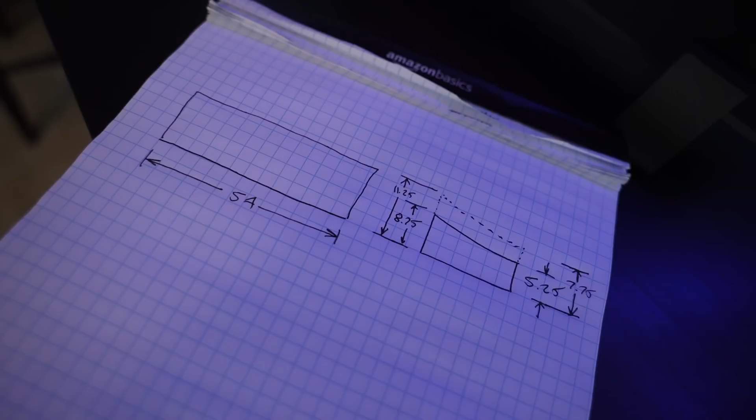Currently here on the channel, I am working on building a custom truck subwoofer system that is going to feature 3 JL Audio 13 TW5s. Off camera, I took some dimensions and determined that without a seat lift, I would have enough airspace to run 2 of these subwoofers. But since we want to run 3, I did choose to do a 2.5-inch seat lift in order to gain more room.

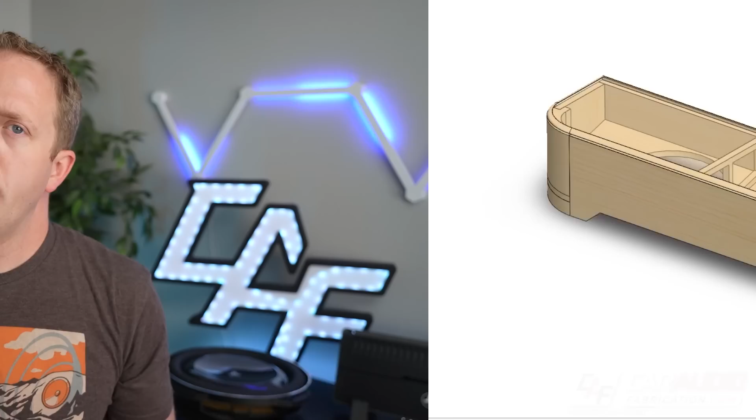So what does the design and planning process look like for creating a custom underseat subwoofer enclosure? Let's dive in.

Before we can get into the design, it is critical that we have proper dimensions to work within. Previously on the channel, I made a full detailed video all about how to find these initial dimensions. Also included in that video, I discuss how you can approximate air volume, so you make sure you don't pick subwoofers that simply aren't going to have enough air volume under your seat. If you haven't seen that video process, at the end of this video I'll have a link for you guys to check out.

So now that we know the space that we have to work within, we can begin to plan out our design.

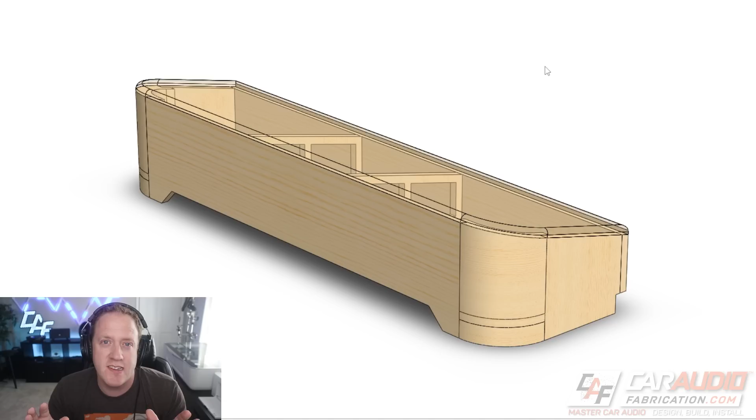Let's head on over to the computer and check out this design. So here it is, my friends. If you guys have watched my design videos before, you know that I like to always start with the finished project, so you can see what we are working towards once we start stepping through all of the design details. So here it is.

Here's our enclosure. If we flip it over, obviously the top is going to be a solid piece of wood, it won't be clear like this. I just made it clear here in the model so you guys can see inside, but you can see there are 3 subwoofer cutout holes for our 3 13 TW5s.

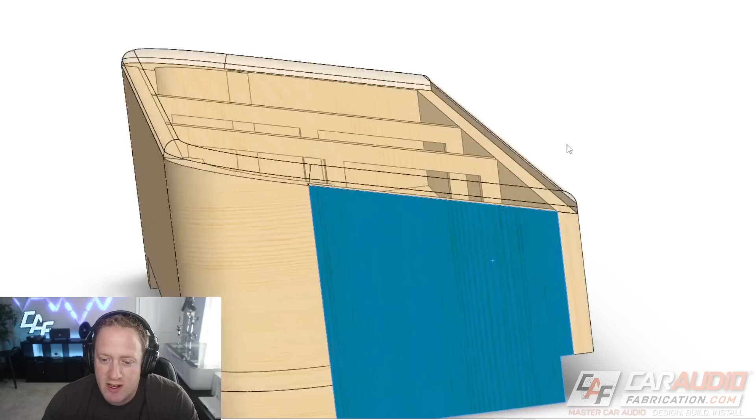I think the best way to begin is just to look at this from the side profile and realize that this is simply just an underseat wedge style shape. You do see that there's a notch here, we'll talk about that more shortly, but overall we just have this one angled top face.

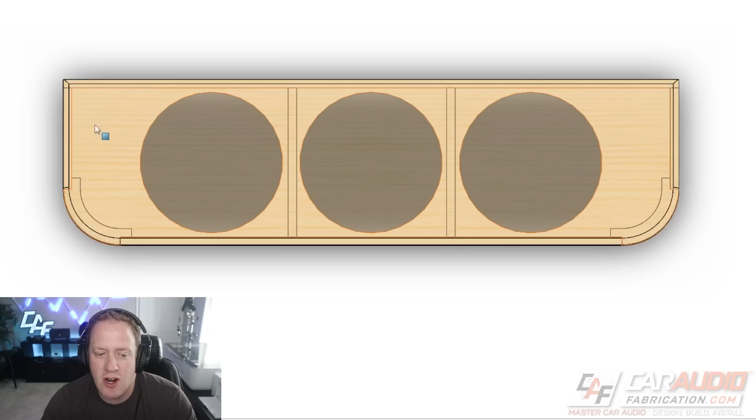Now where things start to get a little bit more complicated is if you look at these front corners of the enclosure, you can see that these are rounded. This really becomes apparent when we look at a top view here. You can see those 2 rounded corners on the front side of the enclosure, and the reasoning for this is because the seat itself in the vehicle doesn't have a sharp 90-degree corner, it has a rounded corner, so we want to match that profile.

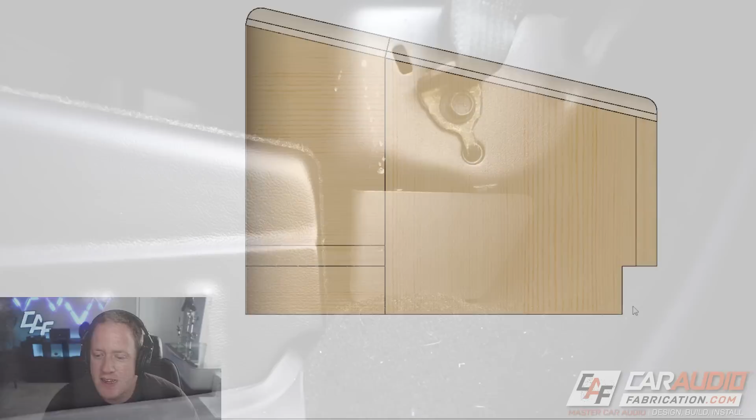Looking at the side of the enclosure again, the reason for this notch here is just because in the vehicle there's a small little notch on the floor, and by having this notch in the enclosure, it doesn't actually eat into any of the air volume. Instead, this notch actually just cuts away part of the side area that is being used to raise the subwoofers off the floor anyhow, so no big deal there. It's just going to give me a little bit more clearance over a raised lip in the vehicle, allowing this back wall to extend a little bit further underneath of the seat.

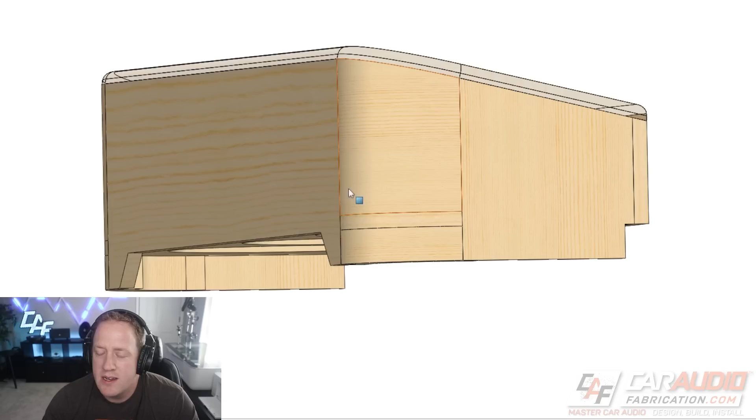Now, just in case you're wondering, the reason that we went with downfiring on these subwoofers rather than upfiring them into the seat is typically in a truck application, you're going to find that loading that bass wave, loading that sound wave off of the floor, is going to result in better sounding bass.

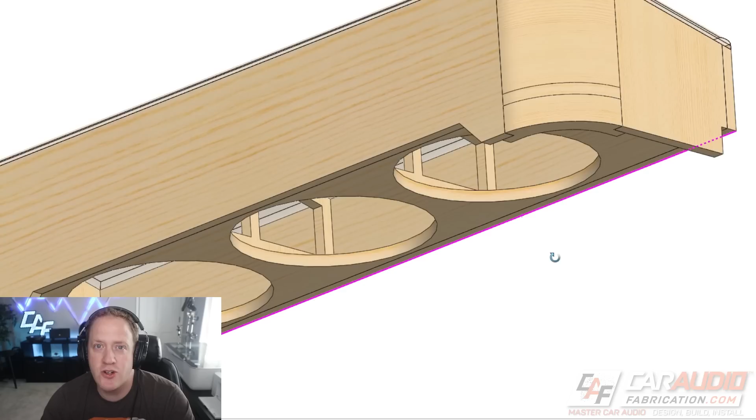Now, this isn't always a hard rule. It can be different from vehicle to vehicle. I recommend building a small test enclosure that is just really simple, 6 sides, before you ever build out a full complex enclosure like this, just to test and make sure that you like your orientation.

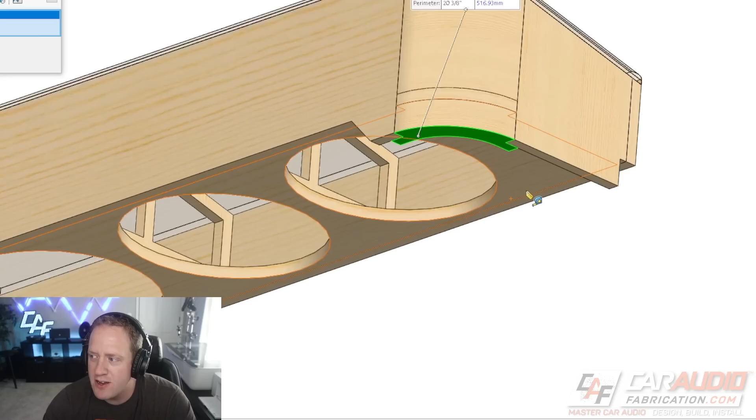But in this case, like I mentioned, we are going down firing rather than up firing. What's important when we're doing a down firing enclosure is we want to make sure we have enough clearance from the floor to the mounting surface of the subwoofers. We want to account for the thickness of the subwoofers, and for the fact that the cone and surround will move with the excursion of the subwoofer. We obviously don't want the subwoofer slapping the floor of the vehicle, so this is an important design detail to pay attention to.

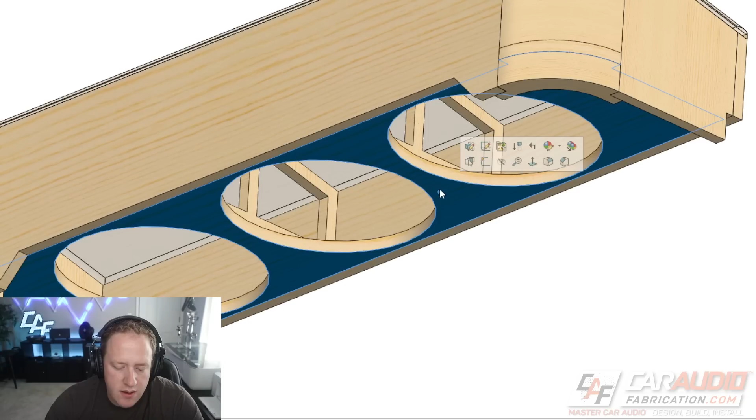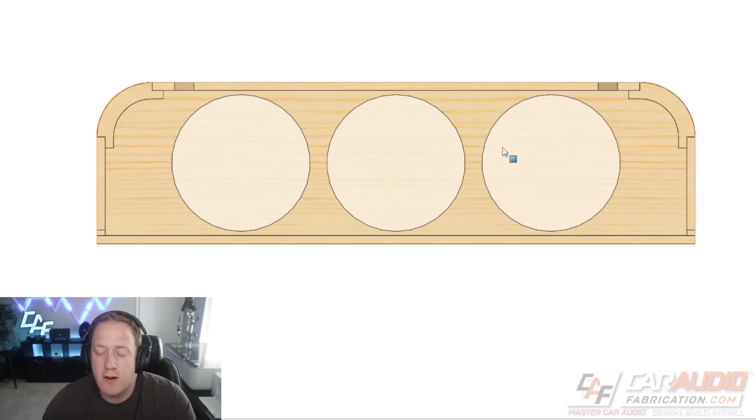Now, if we look at this enclosure from a bottom view, you can tell that on this baffle - the piece of material that the subwoofers mount to - a lot of material is removed because we have to have those cutout holes for the subwoofers to go inside. Because we've removed so much material from this surface, it's a good idea to tie this surface to another surface to strengthen it and tie it to other sides of the enclosure, and that's why we have these internal window braces on the inside of the box.

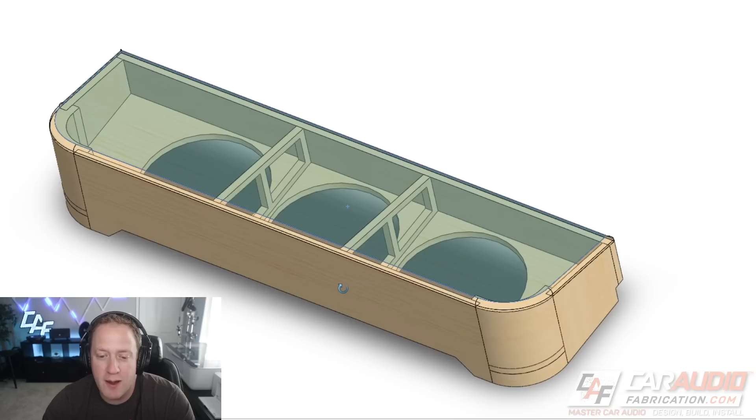Even with the top of this enclosure being a large solid piece, it's a good idea, since it's such a large spanning piece, to have those braces there as well, just to strengthen it all up. This is going to make our enclosure really good and strong and avoid any resonance issues.

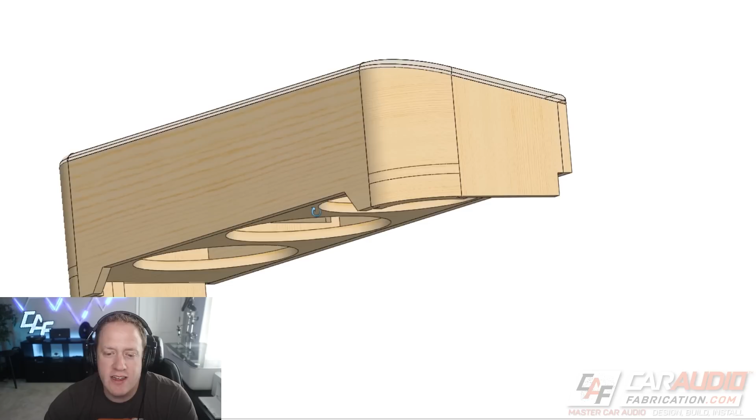Now, you'll also notice there's a cutout on the front of the enclosure underneath here. That's to allow some of that energy from the subwoofers to transfer into the cabin of the vehicle. We also have a raised cutout on the back side of the enclosure here. What I really want to point out, since this often gets brought up, is that this isn't going to be sealed to the floor of the vehicle. It's not an airtight seal, so that energy transfer is going to be able to occur even though we are so close to the floor of the vehicle.

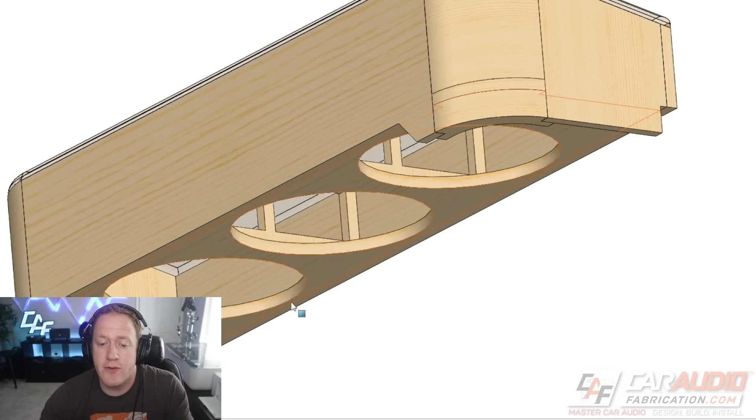And that's another thing worth bringing up. A lot of times people ask with a downfiring enclosure, hey, don't you want more space between the subwoofers and that surface? Ideally, yes, if you could have more space, that would be great. But the problem is, if we raise these subwoofers even more, then we're losing our much needed air volume inside the enclosure that we need for the subwoofers to properly operate.

Now, while we're on the topic of air volume, before we begin the design process, we of course want to have an idea what our target air volume is going to be. In this case, this is a sealed subwoofer enclosure that we're making. So let's check out the specs here, and it looks like we want to target a sealed air volume of 0.8 cubic feet per subwoofer. We have 3 subwoofers, so our goal is 2.4 cubic feet of air volume after all displacements. Let's discuss that during the design process as well.

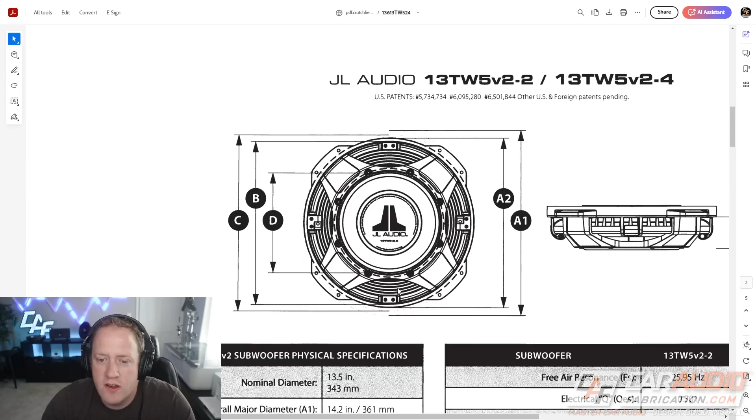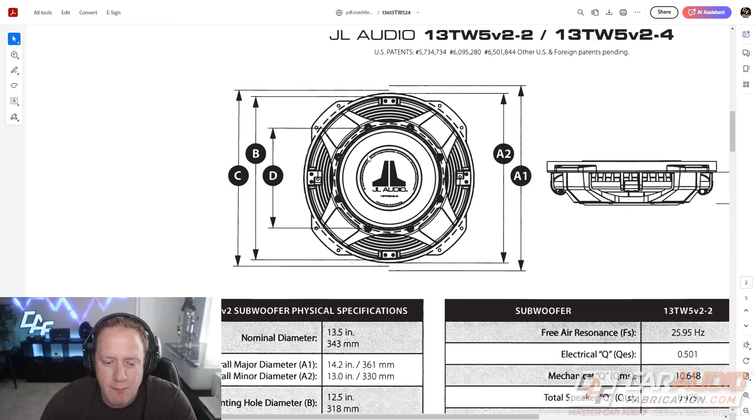So once we've clicked that, we can of course usually find some important dimensions that we're going to need for designing our enclosure. Things like the mounting hole diameter, that's the cutout hole in the baffle. Also the outside diameter of the subwoofer. This particular subwoofer is kind of unique in that case - we'll talk about that more in a second. And we're of course also going to want to pay attention to the mounting depth. This is critical for underseat enclosures.

So let's roll back our design history here to our very first step. And this is where I create the overall profile for the subwoofer enclosure. Now, based upon some of our initial dimensions that we've already taken, we know we want a 54-inch width and a 14 3/4 inch depth.

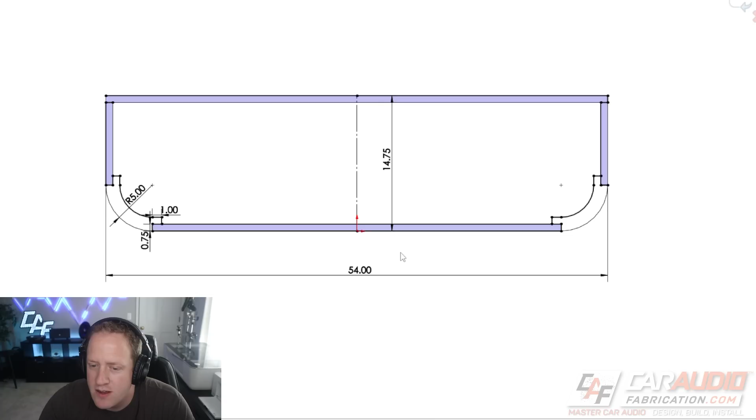So I've got those values in there, 54 and 14.75, and I've also added in these rounded corners. Now, the reason I haven't just drawn a simple round over there is because I want to actually stack these corners up. I'm going to be using some of the Mobile Solutions quick corners, which have this profile here, which will allow me to easily create a stacked rounded profile for the outside of the box.

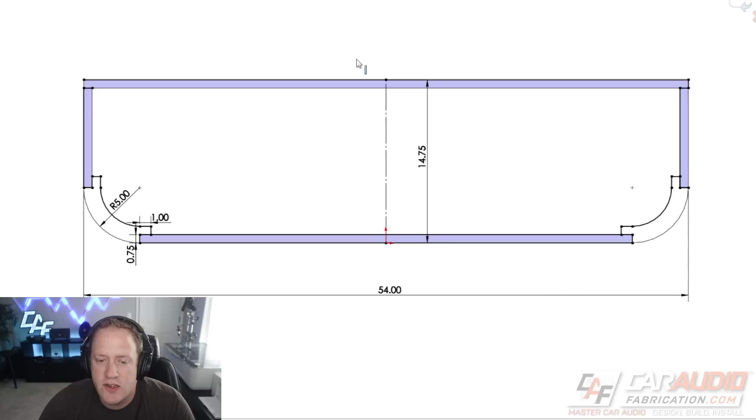So based upon this initial profile, what I've done is I've extruded some of those rounded pieces, and I've extruded these to a height of 1 3/4 inches. The reason for that is I took some measurements of my subwoofer, and it's about 1 inch from the bottom flange of the subwoofer to the tip of the surround. And then I know the excursion of the subwoofer, that's in my manual right here, it's about 0.433 inches. So I know that worst case scenario, it's going to be about 1.433 inches that surround is going to come away from the mounting surface of the subwoofer.

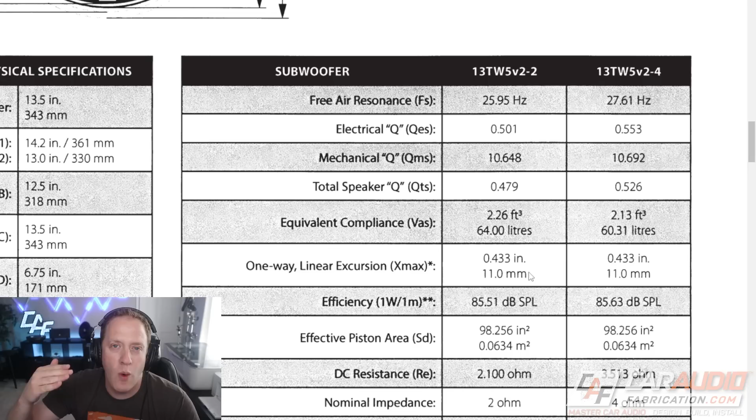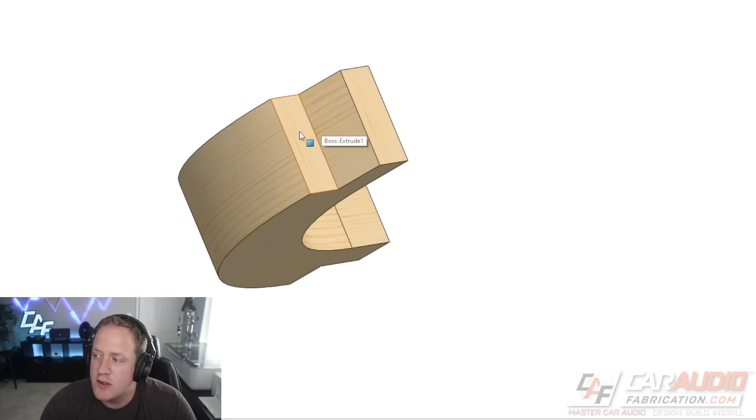I know that this surface is going to be the floor of the vehicle, and I know that this surface here is going to be the same surface that the subwoofer is mounted to. So as long as that height dimension is more than that 1.433, we should be good to go. And I like to give myself a little bit of extra breathing room, so that's why I went with 1 3/4 inches. So when I go to actually create this piece in real life, I'll make it out of two 3/4 inch pieces of wood. That will give me 1.5 inches, and then I'll add an additional 1/4 inch piece.

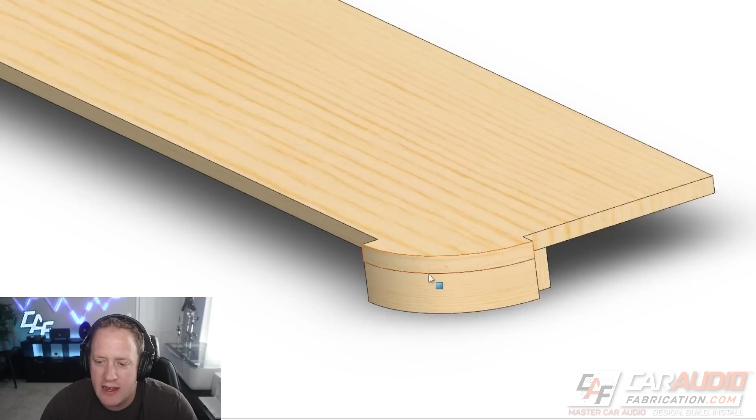Now for the next step here, again, based upon that initial profile that I drew, I'm going to create this board here. This is going to be my mounting baffle for the subwoofers. It's simple enough, but you can see that it notches in following those curved corners. And the reason for that is this is going to give me a surface to attach some of these vertical pieces to. Stepping through to our next step here, I've just extruded this profile even higher, and I intentionally go much higher than I know the front of the enclosure needs to be. And that's because we're going to trim these off in the model much like we will in real life.

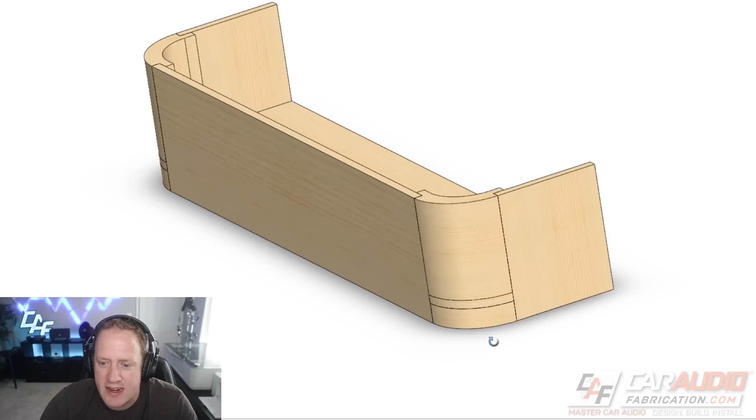So now that we have those added in, let's add the front and sides of our enclosure as well. I've simply drawn those in and extruded those. I'm going to be using 3/4 inch materials throughout the build of this enclosure, so I knew what I needed that extrusion to be, but we've got those added in now. So now that we have that front and two sides of the enclosure, let's go ahead and add ourselves in a rear panel of the enclosure. And now we can do the cut of that top surface.

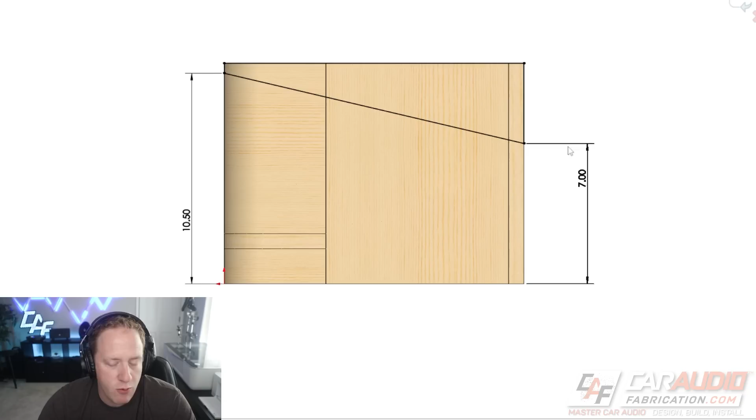I want to show you guys really quick how I did that cut because this is important. We have to make sure and remember that we're going to add a 3/4 inch top piece to the top of this enclosure. So I don't want these values to be the total value that I want the final enclosure to be at. I want them to actually be 3/4 of an inch less. So since I know the rear of my enclosure needs to be 7 3/4, I've got 7 inches here. And since I know the front of my enclosure needs to be 11 1/4, I've got 10 1/2 inches here. Again, it's 3/4 inches less.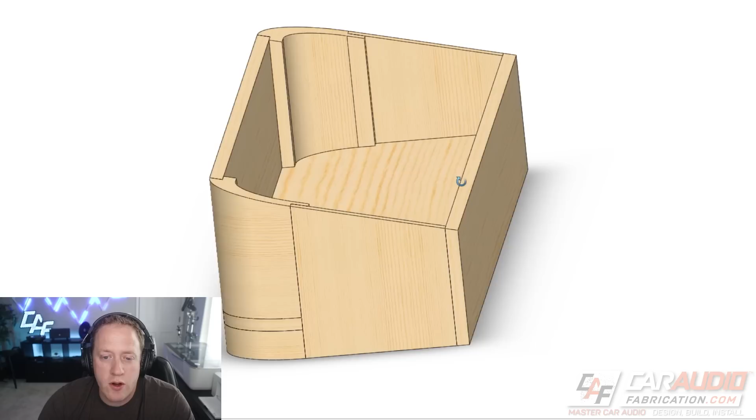So I've created this triangle profile here. And if I execute this command, you can see it makes that cut right there that's going to trim off the top of our enclosure. Now, the reason it's advantageous to work through this design process on a computer is now I know in real life that this board here, I'm just going to make an angled cut like that. This board here, when I cut this top piece, I'm going to actually cut it at an angle on the table saw. And then we have some cool router trickery that we're going to use to make this complex cut on this stack of the rounded corners. If you guys want to see how I do that, definitely be sure to follow through the rest of this build.

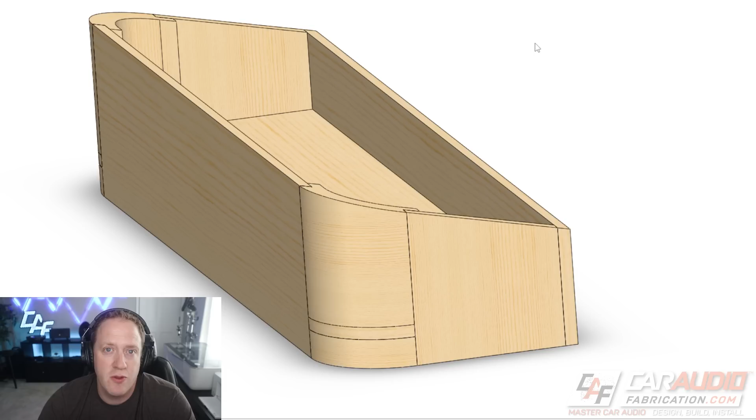So now we can add the top panel of the enclosure, and when I'm designing on the computer, I like to build it like I would in real life. I think it'd be easy to extrude straight up and create a board that you wouldn't really be able to create effectively in real life.

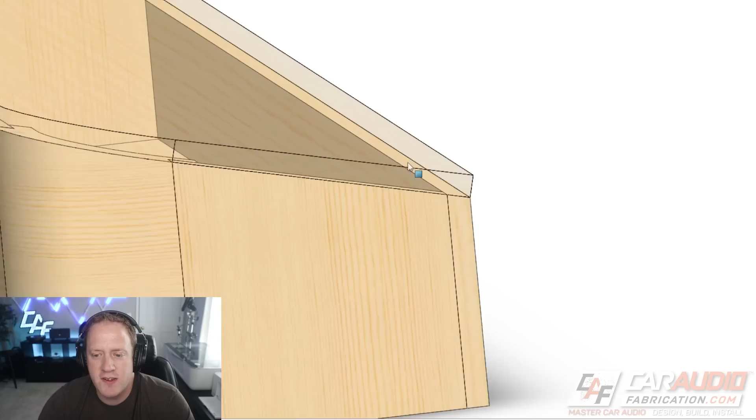Instead, what you're going to do in real life is you're going to just cap this off with a sheet that is tangent to this top surface here. So you can see that's why it has this slight little angle to it. So in real life, I'll add that. I'll run a router on this top surface here with a flush trim bit that's going to pick up these side profiles. And I'll intentionally oversize this piece when I cut it in real life, and the router will trim it down and make it nice and flush.

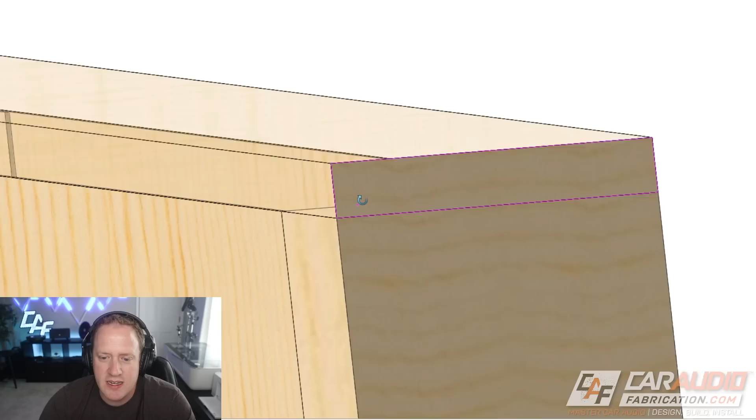And then on the back side here, it wouldn't really work to oversize it and do that router trick that I was talking about. Instead, when I make this panel, I just need to make this angled cut on the table saw. So you can see I just did a small little cut extrusion. I'll show you the sketch. It's just a small little triangle right there that's going to remove that extra material from the model.

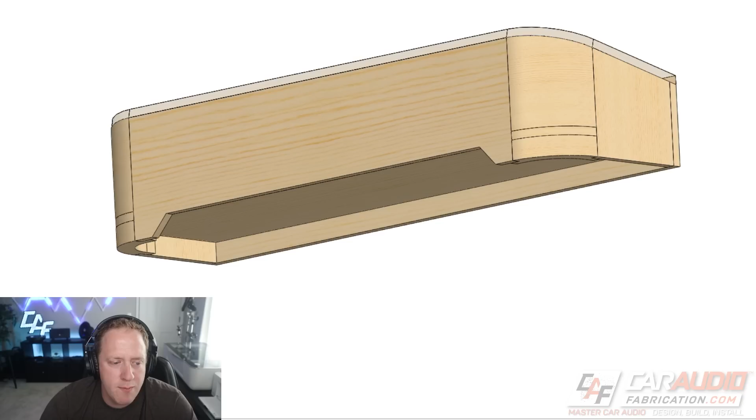So now we've got the main sides of our enclosure framed out. We need to start adding some cutout holes. And first I want to add that cutout hole on the front of the enclosure that's going to allow some of that energy transfer out from the subwoofers. And with that in place, I want to make the actual subwoofer cutout holes. Now the design of this cut is very important.

It would be simple to just model the actual cutout holes for the subwoofers and think you're good to go, but you also want to double check and make sure you have clearance for the outside flange of the subwoofers as well. What's unique about the JL Audio thin line subwoofers, the TW1, the TW5s, the TW3s, in this case these are the TW5s, is they have this tab ear design. And this is actually a really nice feature.

What these tab ears allow you to do is have enough room on the flange of the subwoofer to actually be able to physically bolt it in, but by only having those mounting holes in certain locations instead of all the way around the subwoofer, you can actually put two subwoofers a lot closer to each other.

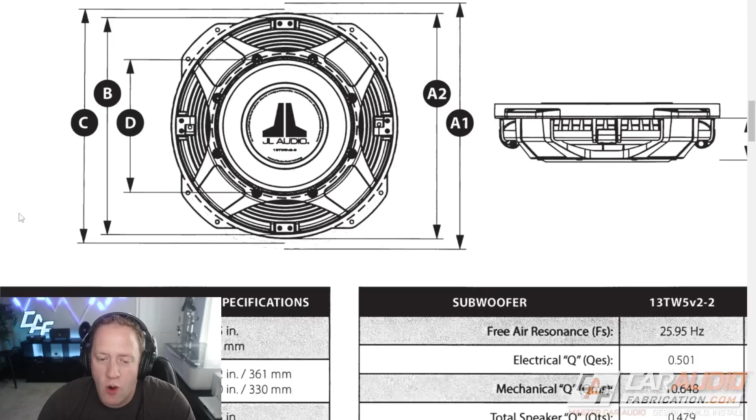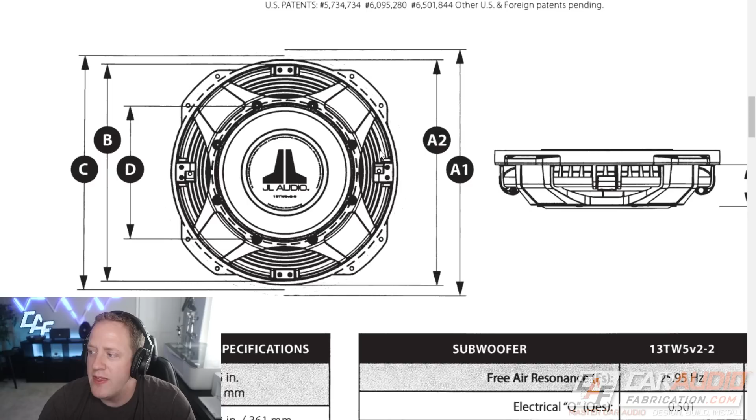So you'll see that this A1 dimension they have at 14.2 inches, and then the A2 dimension is 13 inches. So that A1 is the outside diameter of the tab ears here, and then the A2 dimension is the outside diameter of this circle that you see right here. So I can account for this when I'm doing my design process. You can see that I've drawn in a construction line circle that's 14.2 inches. That's the outside of the tab ears. And then I also have the 13 inches, which is the outside diameter of the actual subwoofer itself.

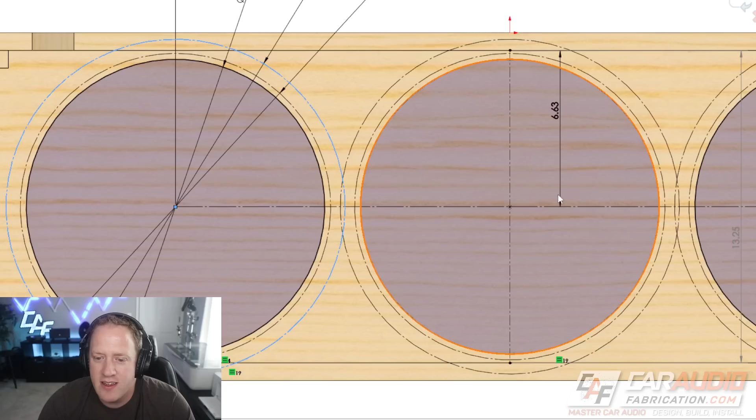And you can see that the tab ear diameters overlap, but I don't have to worry about them hitting each other because the tab ears are up in the corners of the sub. So I can effectively get these subwoofers closer to each other, which is valuable because we start to run into clearance issues as we get towards the outside of this enclosure. The final diameter circle I have in there, of course, is the 12.5 inches, which is my cutout hole size for the sub.

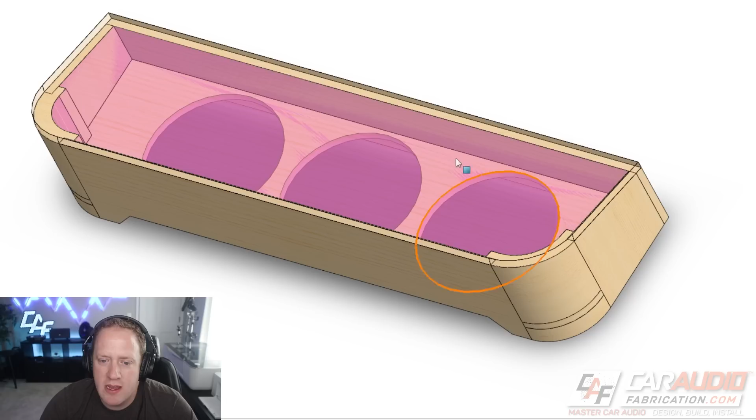So with the cutout holes now modeled in, now's a good time to check on our internal air volume. If you see this pink area here, that's actually a solid. If we turn on a quick cross-sectional area here, you can see that it's filled. It applied that wood texture, but that's actually that pink surface in there. That pink area is going to give me my internal air volume because it starts at the inside surface of our mounting holes here, and it's the same shape as that inside profile, and it extrudes up to the top surface of the enclosure.

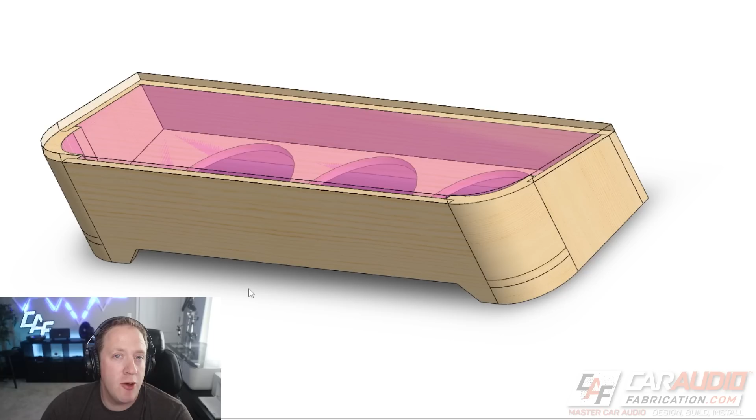So what I can do is check my mass properties here, and I can select that exact body for our volume calculation, and I can see that that gives me 4,199 cubic inches internally to work with. So if we take that 4,199 cubic inches and we divide it by 1728, that allows us to convert to how many cubic feet it is. That's because 1728 is how many cubic inches are in a cubic foot, and that gives us a value of 2.43 cubic feet of air volume inside of here.

Now we have to remember though that there are other things inside this air volume that are going to use some of it up. Notably, there's the subwoofers, but there's also going to be that bracing. So let's get that modeled in as well.

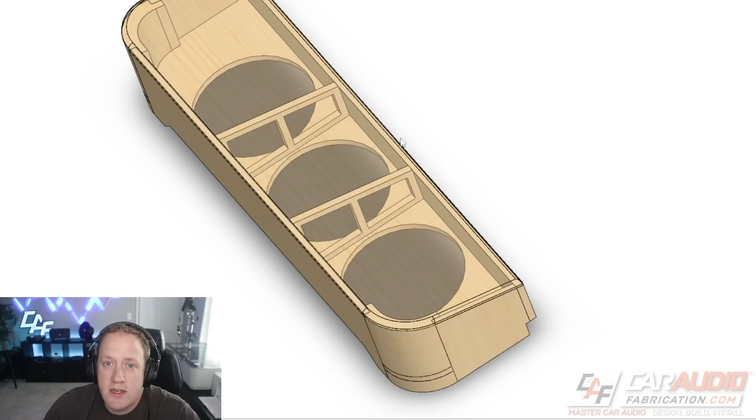To model in this window bracing, I simply drew that outside profile, and then I drew these inside windows and extruded those particular areas there. Just to give you an idea, this dimension here is going to be 3/4 of an inch. So along with the braces being 3/4 inch thick, because I'm making them for 3/4 inch sheet, I'm also going to have a 3/4 inch frame width, if you will, on all of these dimensions.

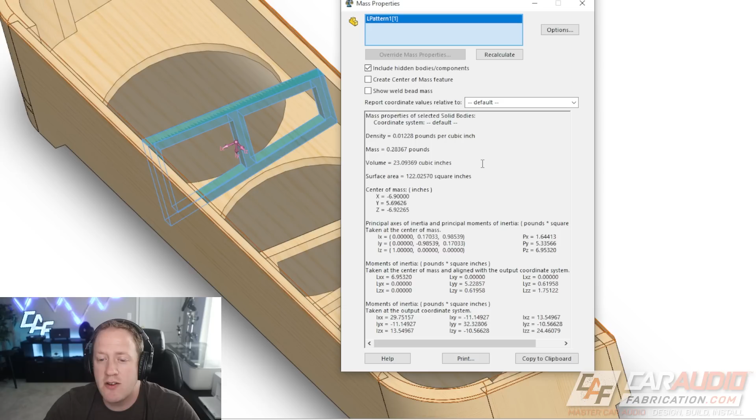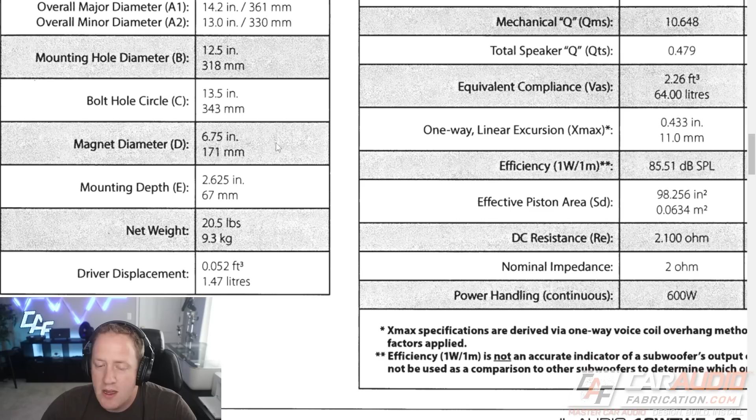The reason it's good to model in these window braces is we can once again determine their exact internal volume. If I check the properties of one of these internal braces, it is 23 cubic inches. I've got 2 of them, so that's going to be 46 cubic inches of offset. We've been discussing in terms of cubic feet, so we might as well do a quick conversion. 46 divided by 1728 is 0.026 cubic feet. If we go to our subwoofer spec sheet, each of the subwoofers has a driver displacement of 0.052 cubic feet.

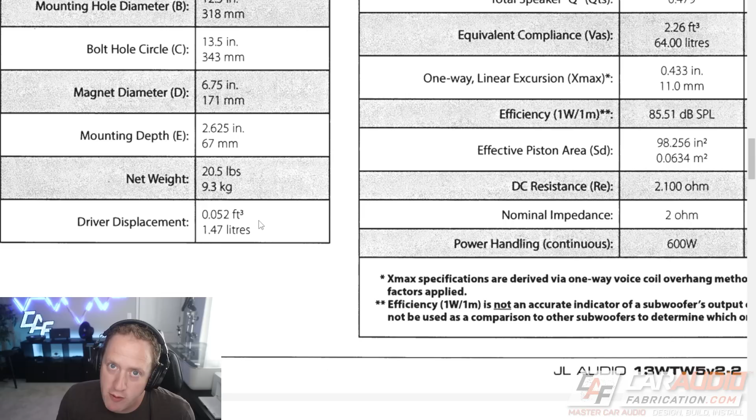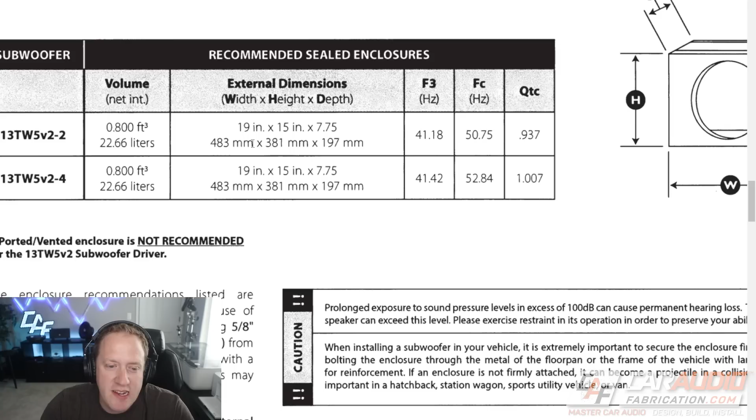So basically, to determine our air volume, we're going to take that value we had before of 2.43 cubic feet. We're going to subtract the 0.026, which is for the window braces, and then we're going to subtract 3 of the 0.052 because there's 3 subwoofers. And I've got my calculator here. That gives us an internal total of 2.248 cubic feet. Now hold on, Mark. I thought that our target air volume was 2.4 cubic feet based on the 0.8 times 3 recommendation from the manufacturer.

Well, let's load up WinISD and do a quick analysis to see what this small volume change may do to our performance. So this white line here simulates the SPL that we could expect if we were using the suggested value of 2.4 cubic feet sealed, and this is at 1800 watts of power. Do keep in mind this is simulating an anechoic response. Let's see what would happen with the same 3 subwoofers at our value of 2.248 cubic feet, again at the same exact power of 1800 watts RMS.

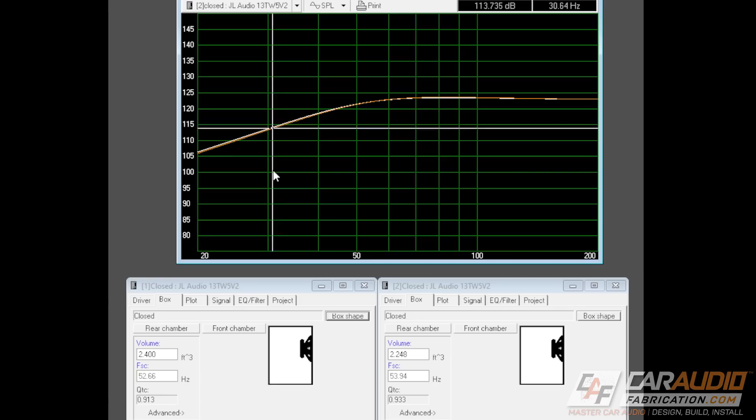You can see that with this orange curve here, there is virtually no difference in performance between these 2 air volumes. In fact, on our white curve here, if we put the cursor at about 40 hertz, we have about 118.6. And if we switch to our orange curve here, we've got about 118.4. So a difference of about 0.2 decibels. And just to put that 0.2 decibels in perspective, you would be able to measure that if you were competing, but you would never ever hear that difference by ear. And do keep in mind that this is if you are at full tilt max volume. Moral of the story here, this small volume difference is not an issue at all.

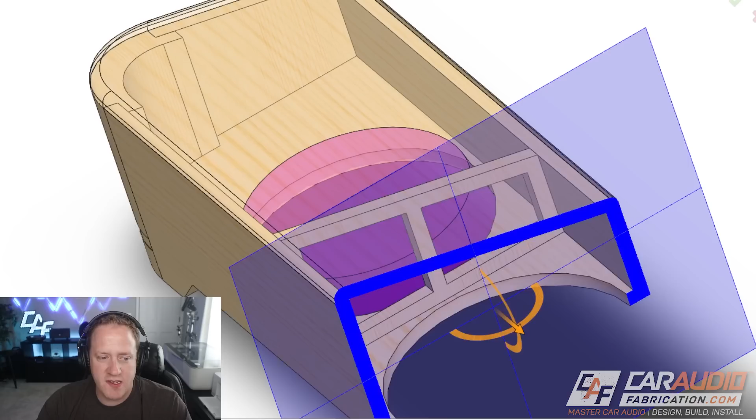Now, while we're in the design process, it's also always helpful to do a quick subwoofer clearance check. You can see that I've modeled in a simulated subwoofer here, and I was able to do that simply by knowing the actual mounting depth of the subwoofer from our spec sheet. I've got that modeled in, and I could do a little section view for you guys really quick here. I knew already that on this enclosure, this is a non-issue just because I did do that seat lift and I do have so much room above the subwoofers, but you can see we verified here, we've got plenty of room behind the sub.

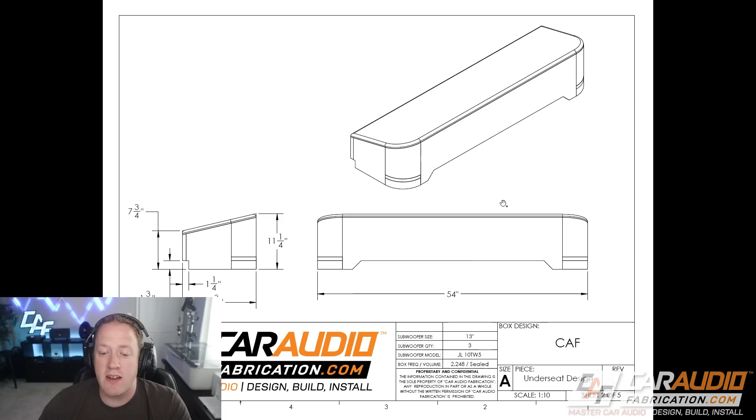So now that I've finished making the design, I can of course also export this in my blueprint format that has all of the overall dimensions of the enclosure, and you can see that this has 5 sheets. The other sheets give dimensions and details for each of the exact boards that you need to cut in order to make this enclosure.